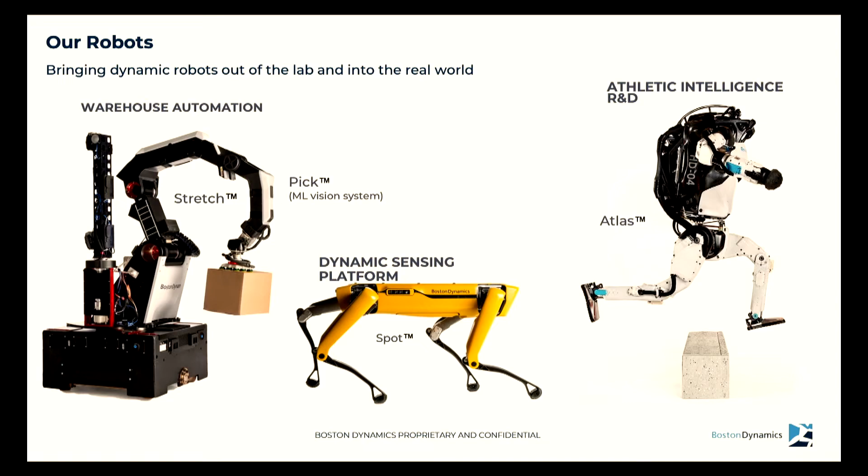We have Atlas, which is the robot that you see dancing, doing backflips, doing parkour. And that's really research into what our leadership calls athletic intelligence. Basically, how far can we push physical machines to behave like human athletes, essentially, and then take the learnings from that, which is the bleeding edge of dynamic robotics, mobility and balance, and then have that filtered down to our commercialized robots. And the first commercialized robot is Spot.

Spot, you can call it a robot dog, some people call it a quadruped, it's a four-legged robot. We've got market speak for it, agile mobile robot, to distinguish from wheeled mobile robots because it has more agility with the legs than the wheels. And lately we've been framing it as a dynamic sensing platform. It is a tool for you to bring automation dynamically through a human purposed environment rather than statically instrumenting that environment.

Here we go. So the way that Spot works is that its body is surrounded by specialized cameras that gives it obstacle avoidance, an amount of depth detection that helps with its autonomy.

It's got automation. This is a big part of it, which is how do we take labor hours out of rote tasks and free up skilled labor for other things. So it does that through a 90-minute battery life, and we also have a self-charging dock to extend that, just like drones with base stations. Some of you might be familiar with that.

And then we allow people to customize it because just the naked robot doesn't really achieve that much. This is a vehicle or a platform for sensors and for software applications to achieve whatever your use case is. I keep pointing this at the TV instead of at the computer.

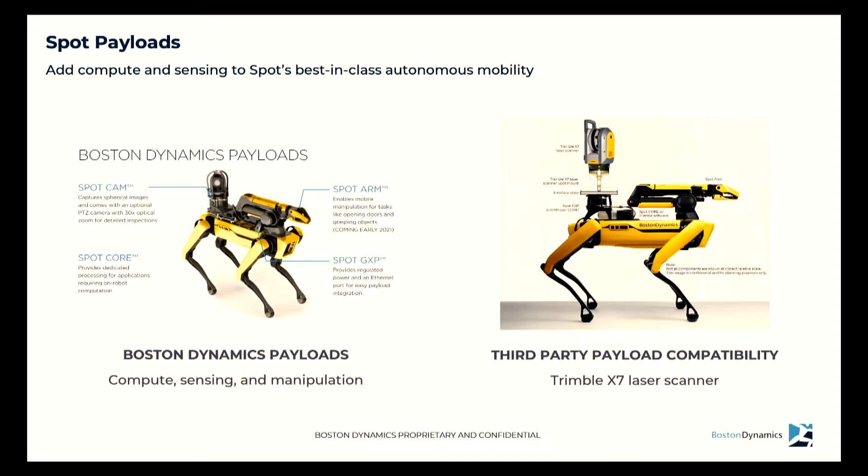But we also knew that we had to maintain compatibility with the things that you already use, taking field devices like 360 cameras, laser scanners, GNSS receivers, and total stations, and allowing you to put those onto this mobility platform to move them autonomously throughout your environment.

So there are a couple different ways to control the robot. We knew that if we had the goal of bringing dynamic robots like Spot out of the lab and into the real world, it had to be as easy to use as, say, like a commercial drone, which is basically like a video game with some joysticks. And that's how our tablet works.

So when you are in the field with the robot, you have a field tablet. You teach the robot where you want it to go in your environment and what you want it to do. That might be a laser scan, taking a photo, doing a little dance. It doesn't matter, the robot will remember it. That gets recorded, and then you can play that back autonomously as many times as you'd like. So the value comes from the frequency and the repetition of that data capture.

And the secret sauce, and the thing that's close to my heart, is how do you make autonomy work in a dynamic environment like a construction site where that site is changing day after day after day. So over the summer, you're gonna have Foster and Partners up here talking about how painful it was to go through our early software, and I'll let them tell that story. But thanks to them, we have the right insight and customer feedback to build in additional features.

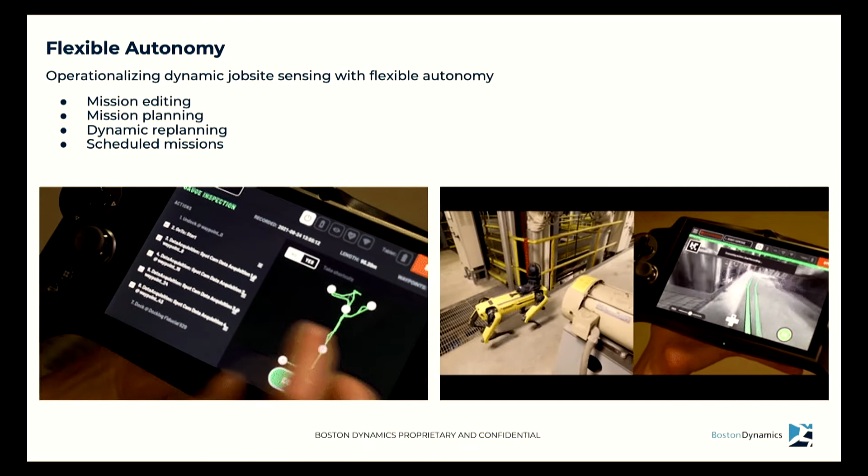So in theory, you want to do the same data capture path, like a daily site walk. I want to take the same 50 photos at the same exact locations at the same time of day, or the same 30 scans every week at the same locations. In theory, you just want that to be the same path every time. In practice, that's not possible on a construction site. Somebody's going to close a door, somebody's going to park a scissor lift. There's going to be an area that's inaccessible because it's going from decking to a poured floor.

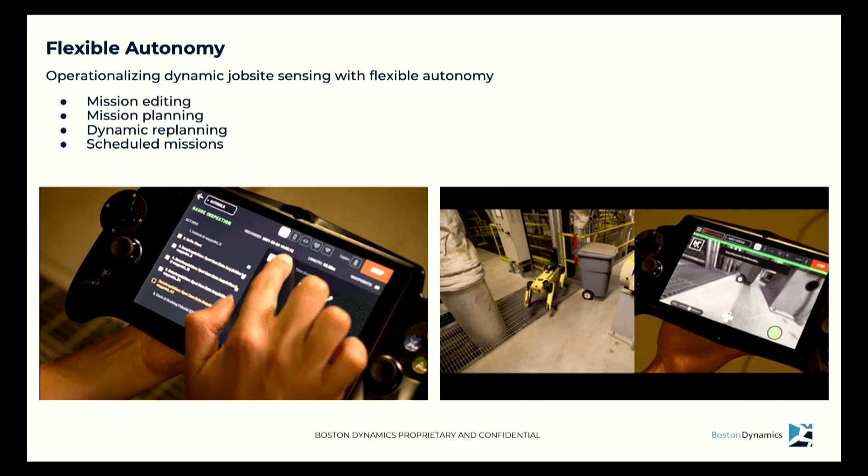There's going to be some reality of the job site that keeps you from doing that. So in the latest software, when you teach the robot where to go, you do that initial recording on site. Wherever you take the robot, there's an underlying topology that interconnects all possible pathways through that environment.

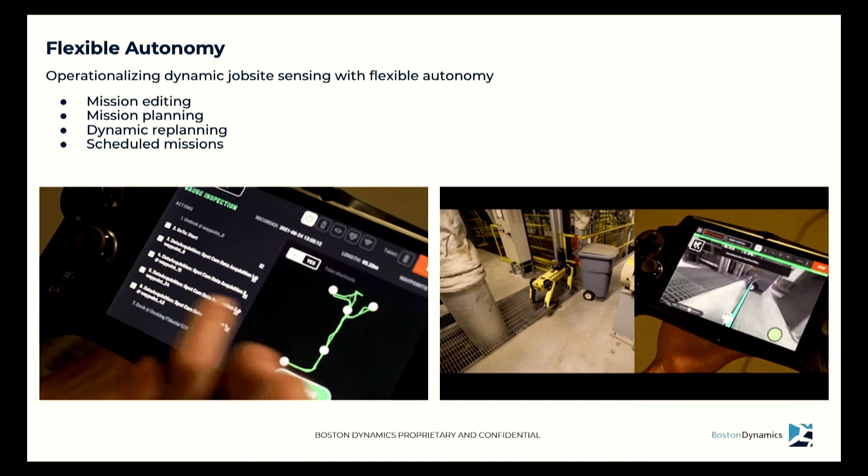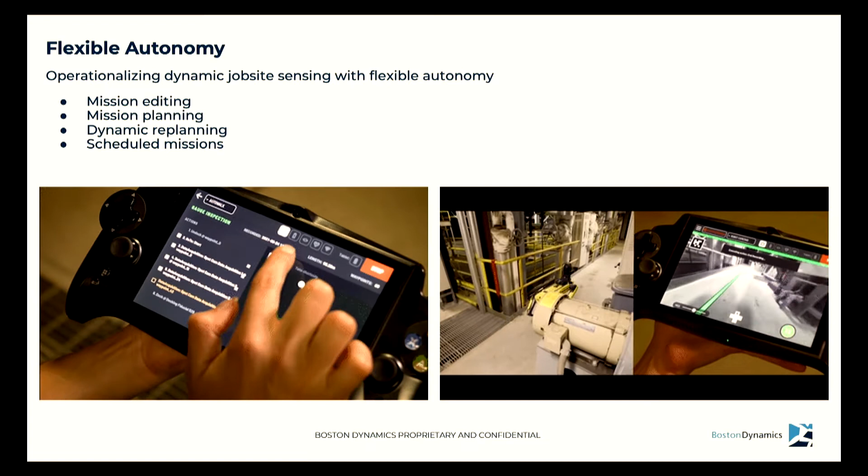So when it inevitably runs into an obstacle, it will just replan. You get a preview of the initial plan through your environment, doing the data capture in the order you want. You can specify and edit that, but the robot will replan itself within safe operation parameters as it encounters obstacles. There's no world in which the robot does the same path every time, and that's okay.

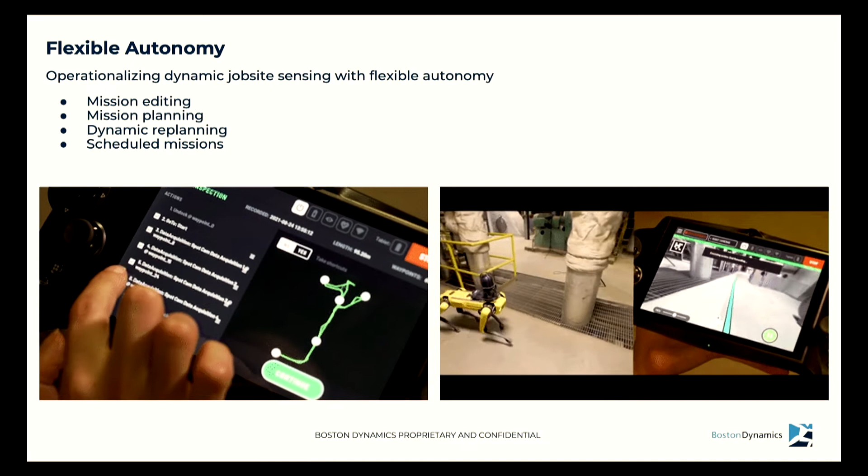This technology is supposed to come into sites as they are. This is not like warehouse automation where the environment has been prepared for the robot. What is novel about this robot is it goes into human-purposed environments as is and adds value.

We're also starting to move from general data capture—just taking a 360 photograph or a scan of the entire building and quantifying progress from that—to being more aware of certain types of objects. Maybe you're asking specifically: do I have the right number of fire extinguishers, and tell me where they are, or tell me if they're in the right place.

Are all of my analog gauges within an acceptable range? Are all the heat signatures or radiation signatures in my environment within an acceptable range? It's a yes or no question, and that's what you care about, and you get that in near real time from the robot.

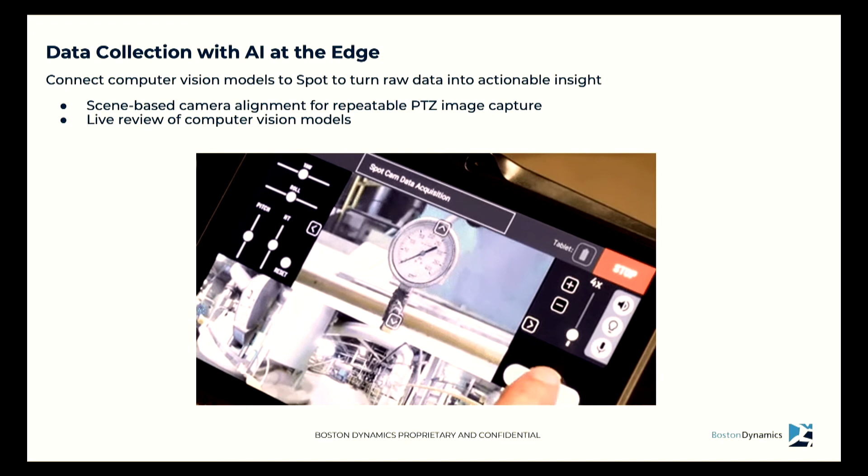And we do that with improvements to computer vision, both ones we've implemented in our own software and also being adaptable with models you might make, models you might train from the frequency and repeatability of using the robot in your environment, or models you just download off the web because other people are working on them as well.

For those models that are siloed in cloud-based applications, we've also given you the ability to upload directly to the cloud through the self-charging dock. So we talk about the dock as a way to extend the battery life and power of the robot for longer missions.

But the thing that excites me about the dock on a construction site is you're never going to have good Wi-Fi or LTE on a construction site—it's just not practical. So if you can't constantly be connected to the robot, you can use that dock as a base station. Whether wired or wireless, it's at least in a static location with a good connection, which is important because one, you need to tell the robot to initiate a mission, and two, more importantly, you need to grab that data when the robot gets it and upload it.

And what I love about that is if you're a stakeholder on the other end who needs to review that scan data or those images, you don't necessarily know or care that there's a robot on the job site. You just know that data is appearing every 90 minutes, and that's what you care about to keep moving. So I like that the robot starts to fade into the background as we work on this as a whole product solution.

We also have something called Scout. Scout allows you to basically put an on-prem server in your environment for advanced remote operations. This tends to skew more toward customers in fixed industrial, manufacturing, and utilities environments, where they can invest in infrastructure. It's a little bit tougher to do this on an under-construction job site.

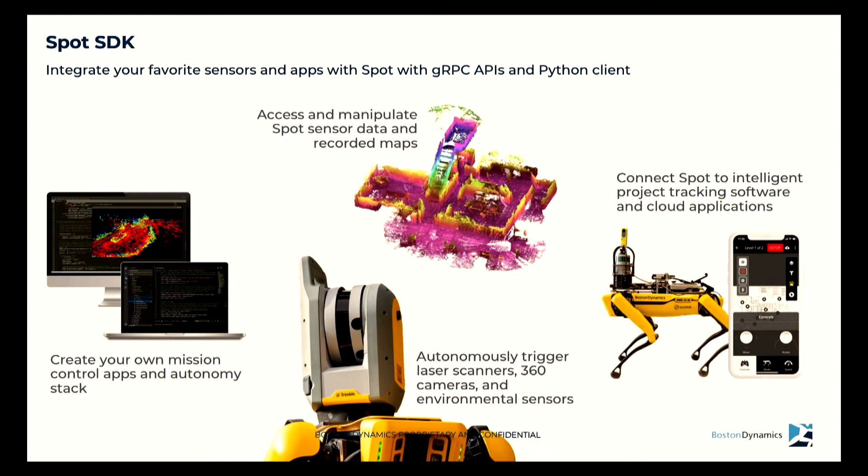When we talk about how Spot is actually being used in construction today, I could put any statistic up about how bad construction is and what the business problems are. By the way, I started in architecture and construction. I am not a roboticist. I come from this industry, and that's why I joined. I was an early customer of Spot and was so excited by what it was able to do on site that I joined the robot side of things.

But the big picture for me is you don't know what's going on a job site at any given moment without physically going there, and that's a problem. If you don't know what's going on in real time, mistakes are made, things get delayed, the site's not staged properly for a trade to come in. Those things pile up, and if your project is over schedule, it's over budget.

So broadly, what are we trying to do? We're trying to increase visibility. That cannot be done and should not be done with people. That should be done with automation. So I like to phrase it as think of Spot as a physical background process, something that's just constantly moving around the site, collecting reality capture so that you have a continuous idea of what's going on at that job site.

So these are all the other ways that you could solve this problem: people, fixed sensors, and other types of robots, and the reasons why that doesn't quite make sense. This also describes about 3 years of my life before I discovered Spot, which was, I cannot find a means of robotic locomotion that is able to traverse my entire job site, that is able to deal with obstacles, material pallets on the ground, temporarily inaccessible areas, stairs, gaps, ramps, et cetera. I love drones, but there are certain limitations to being able to utilize those in interior commercial construction environments. So that's where the strength of Spot really lies, to be able to move.

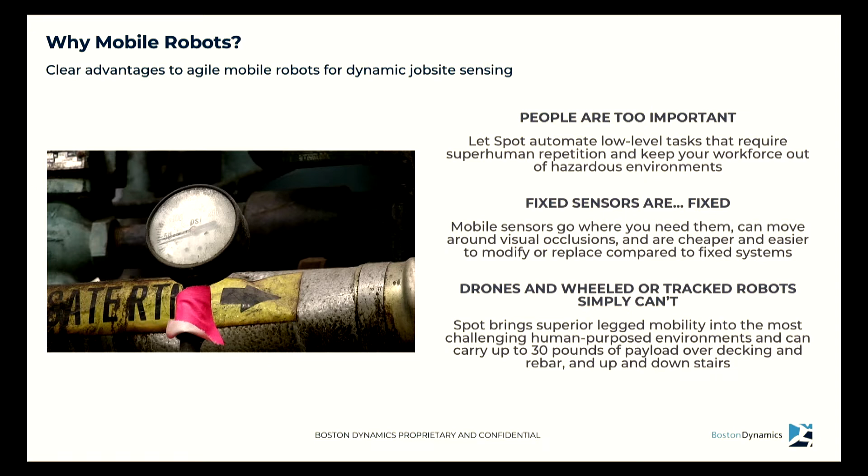If you think back to the days when the company was owned by Google, when we first started taking larger quadrupeds from earlier research and making them smaller into the form that we have with Spot today, it was entirely premised on fitting through a door and moving up and down typical stairs. We need to bring robots into human-purposed environments.

So we're working on two main applications, or our customers are rather, that are really the same thing, but it just depends if you work in BIM or 3D or not at this stage. I see these things converging.

So the first is site progress monitoring, which is basically the daily job walk: taking photos, pinning those to some floor plan. Here we're showing the HoloBuilder integration, which is called Spot Walk, and then having those points get updated so you have a historical record. So this is a very basic job site documentation process that gets automated.

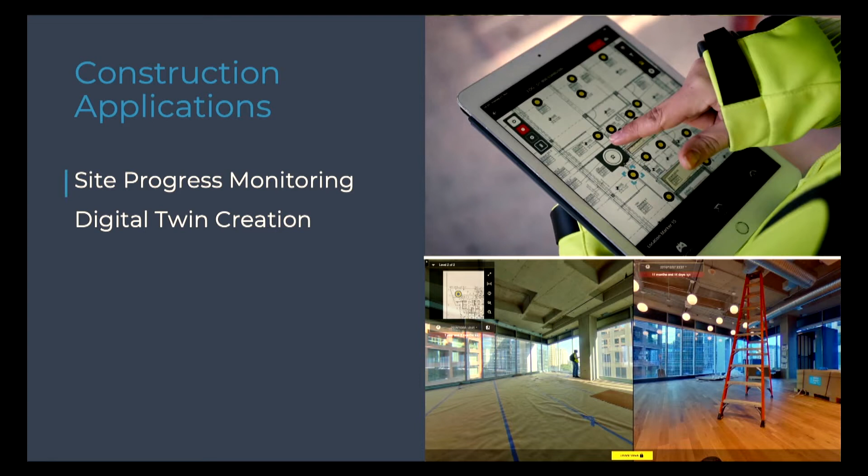And then you can do point-in-time comparisons, and because of the frequency and repeatability of the data, you have a cleaner data set from which you can start to leverage AI tools, computer vision tools that all of these apps now have, that automatically quantify work in place.

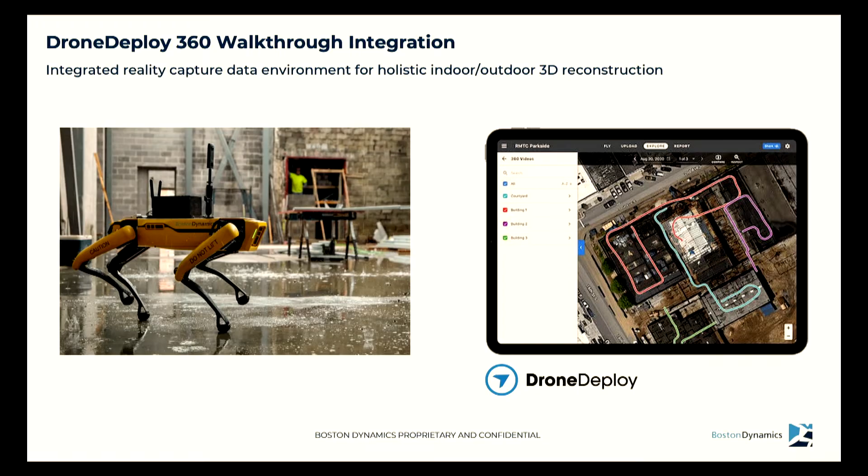Some of our customers, like Brasfield & Gorrie, have also used this with 360 video. So this gives you a Google Street View style path that you can kind of jump into, virtually experience the site, and then the denser image frames that you get with video data allow you to do things like photogrammetry for 3D reconstruction. In this case, with DroneDeploy in combination with drones for full interior-exterior.

Digital twin gets more into the 3D space, but also gets more into the real-time synchronization between what's going on in the digital asset and what's going on in the physical environment. So on the right, you're seeing the Trimble Field Link product with Spot that we're going to talk about, or David's going to talk about next.

And then on the bottom, you're starting to see tools. This one is AVVIR. There are several of them out there competing that start to associate features and point clouds with BIM elements so that reality capture data can actually be ingested by BIM.

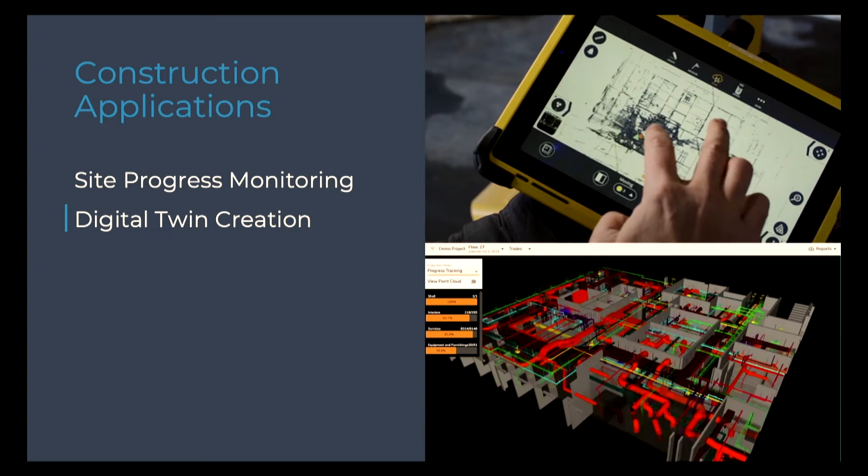There are two big problems with BIM and reality capture. One is that BIM was not designed for reality capture. The second is that no one's using BIM. But that's a separate conversation we can talk about. We're working toward that end, we have that vision, and that's where the industry is going.

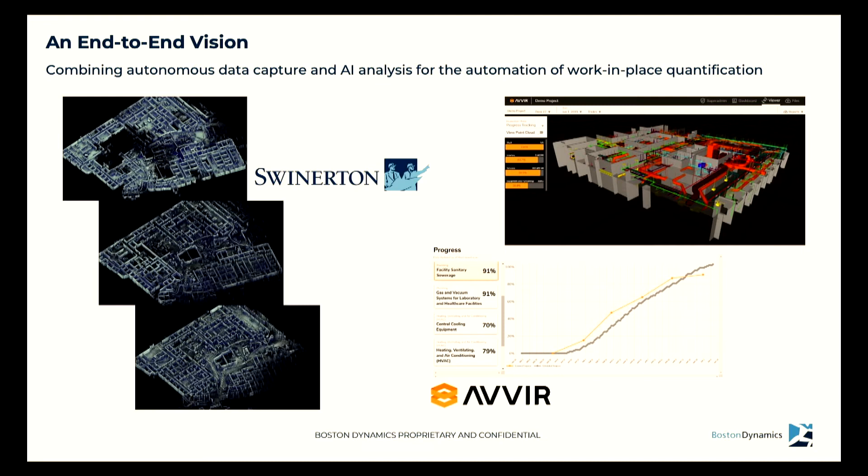So here we have Swinerton, again working with the same tools and starting to realize if scanning is now very easy, now we can scan every week, what new possibilities does that provide? Spot is not replacing how data capture was done before. Spot is a technology that's allowing you to rethink what you can do with reality capture if it can be done constantly, because it's so cheap and easy and automated.

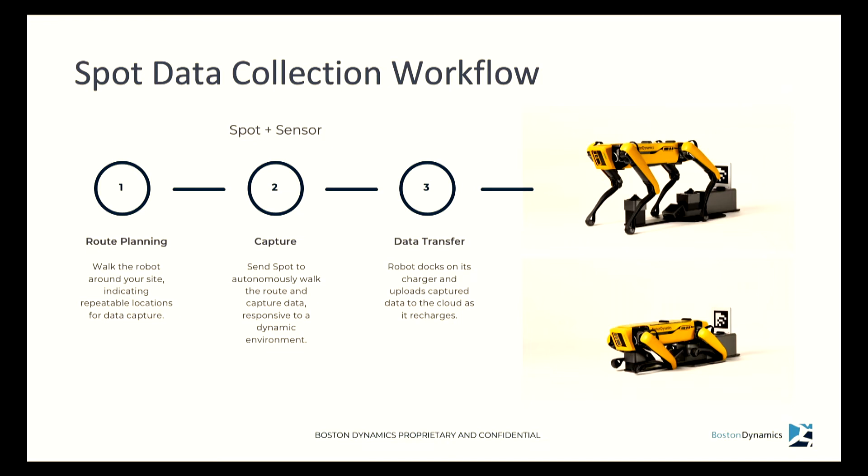We're going to give you the software to plan the data capture. We're going to give you the robot to automate the data capture, and then we're going to give you the tools that facilitate uploading that as part of the mission at the end of the data capture to whatever cloud location or application you want.

But we need partners, we need an application ecosystem to do all of the analysis. We're not going to work on construction-specific AI at Boston Dynamics. We're a robotics company. We're going to create a robust robot platform for a more knowledgeable construction company to solve some of those downstream problems that turn data capture into action and insight and value.

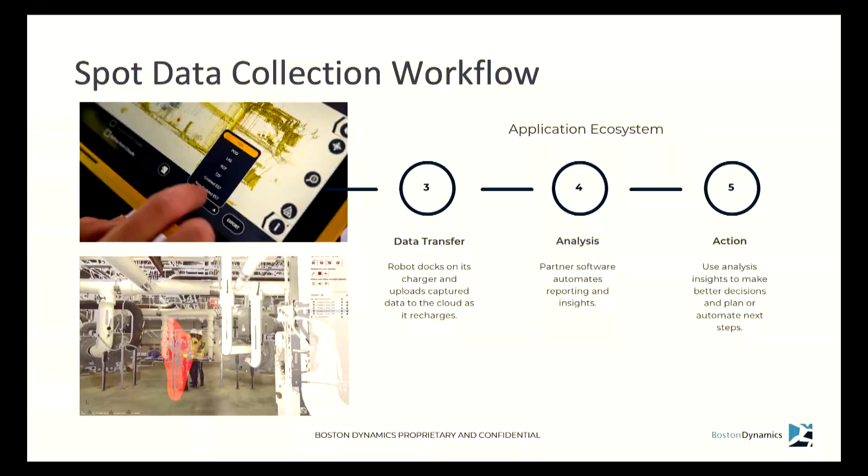So with that, I'll turn it over to David.

Thanks, Brian. So I'm David Burczyk, I'm the construction robotics lead at Trimble, and I'm focused on heading up our business area and the integration of the Trimble platform with the Boston Dynamics platform.

So as Brian was talking about, a year ago we announced a strategic alliance between Boston Dynamics and Trimble. And the reason for that is we wanted to merge the expertise that both companies brought into this one common platform to bring robotics out to the job site.

Our underlying vision around this integrated solution we're working on is really to bring fully autonomous robots out to the job site and become a collaborative robot, or cobot, to work side by side with the teams on site. Let the teams on site focus on higher value tasks, and let these robots come out and start to capture and take over tasks that might be unsafe or redundant, so the teams on site can really focus on the high priority items they need to work on. The value of bringing this together is that it improves the overall safety, quality, and speed of construction on the job site.

So that became the underlying vision of this co-developed, collaborative platform between Boston Dynamics and Trimble.

So what we've done is put together an autonomous field capture module with our software called FieldLink. This is the application that runs all of our hardware used in the building construction process today—it's the software that controls our robotic total stations, the 3D laser scanners, and the GNSS or global navigation satellite systems used for building construction, from 3D reality capture to building set out with total stations. We've taken the Boston Dynamics platform with Spot and integrated it into that application so now you have one software application that controls multiple hardware devices for all the different ways data capture can be collected on the job site.

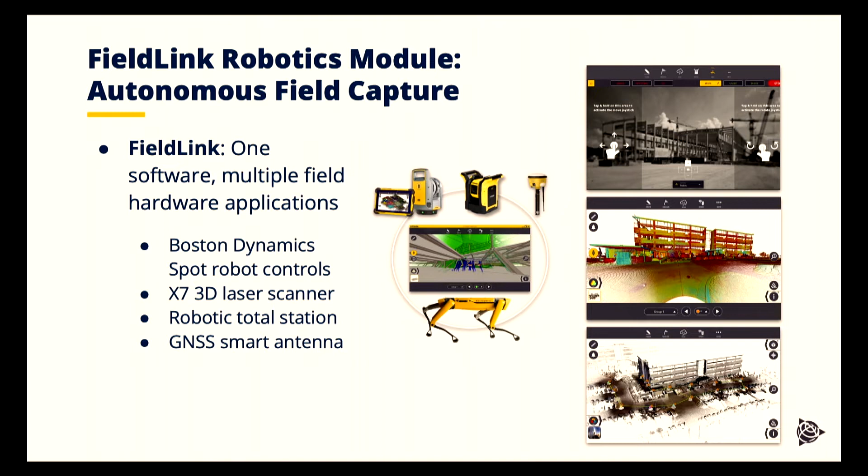We've brought this together as a co-developed solution to add this as a robotic platform on the job site. So what we developed working with Boston Dynamics is a full turnkey solution. We've put together an application that's the bare minimum of what you need if you want to bring robotics out onto the job site, taking what Boston Dynamics provides through the Spot platform with the Spot robot.

It's the enterprise robot, with their onboard computer called Spot Core, and also their enhanced autonomy package. We've merged that with the Trimble solution. Our first integration is using it with 3D laser scanners, and then we're going to start to carry that into using Spot with robotic total stations, and also with GPS applications as well. But all this is to provide a turnkey solution so you're working with one application, one vendor for all your support, training, and needs out on the job site.

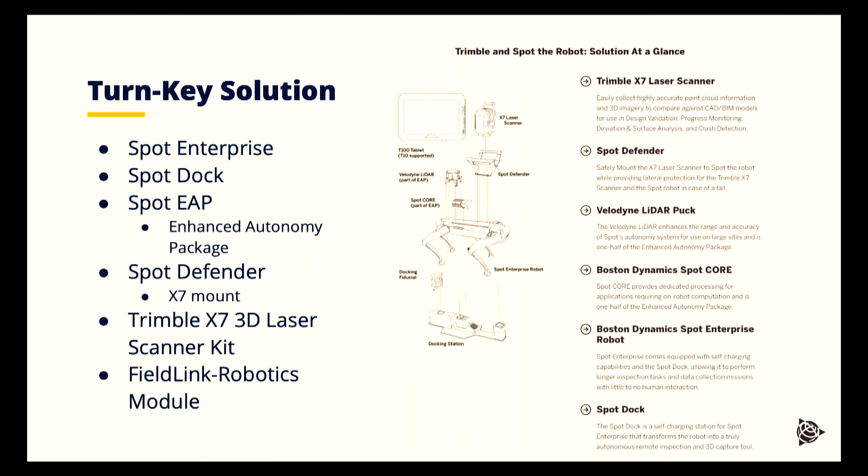If you're not familiar with how you actually operate Spot to start the autonomous capture on the job site, the very beginning is to go out and define a mission. You need to tell Spot where you want to go out and capture the data. That's the first step of the whole process.

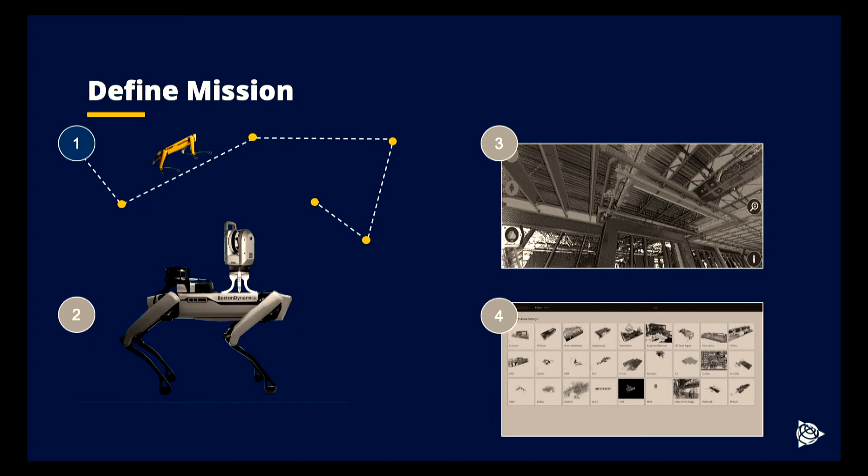Using the solution, you take the ruggedized tablet—we have our own tablet device that works with the Trimble solution, with Spot controls built in. It's all through a digital joystick kind of interface that allows you to connect to Spot and manually control it. In that application, what you're doing is teaching Spot how to walk the site.

Oftentimes there's some confusion when people see images of people with the tablet controller operating Spot—they think it's just a remote control car. But essentially what you're doing is teaching Spot its path before it can do that autonomous mission.

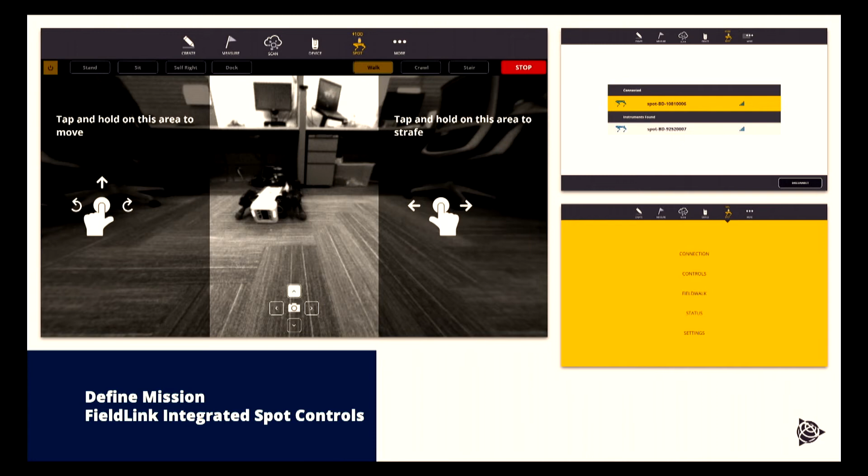So you're going to go out on the job site and teach Spot where you want it to go and collect this data. You walk it through the job site, and as you go along that path, you can define what are called waypoints. Waypoints are areas where you want Spot to perform some type of action, depending on what payload is on the back of Spot—that's where the action will take place.

In the case of putting the laser scanner on the back of Spot, everywhere you define a waypoint is where a laser scan will be captured. You walk Spot along the job site, teaching it this path, and it records its locations and stores that in its memory. Once that's stored, you can run that mission multiple times on a regular basis, or schedule it to be captured regularly.

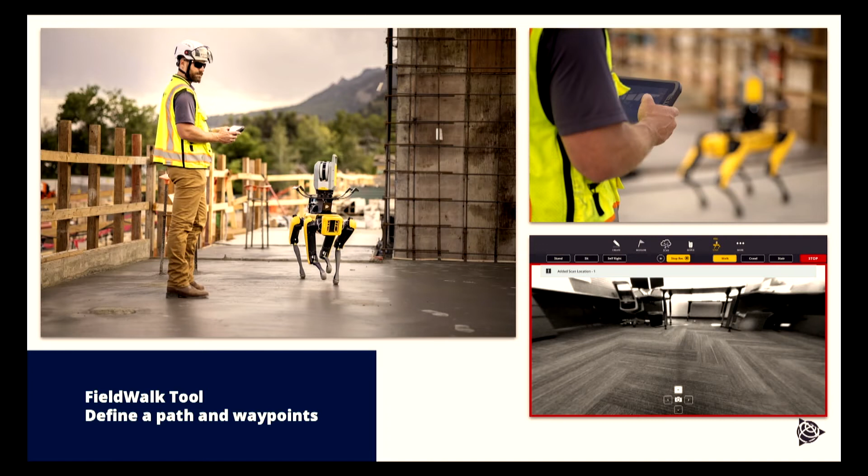Now that you've taught Spot the path, you can do the autonomous capture piece, where the value of the different types of solutions on the back of Spot come into play. Because if you want this to be an autonomous solution, it needs to be hands-off—you need to take the human out of the equation so they don't need to monitor the different payloads on the back of Spot.

This is where, like the laser scanner we're using—called the X7—that's on the back of Spot has the ability to do its own automatic calibration, level detection, and registration of the data in the field. So once Spot starts that capture, all the registration and acquisition of data is happening automatically on the job site.

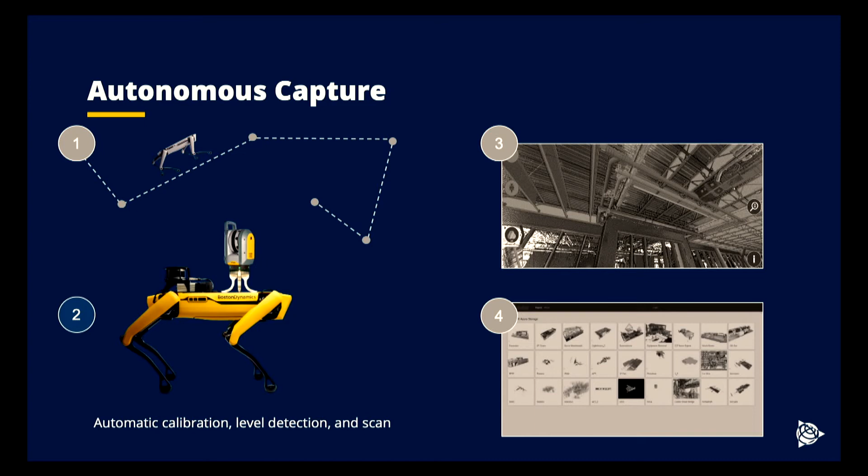Once you're ready to do these kinds of missions to be repeated over time, you go back into the software, and that mission you programmed is stored in Spot's memory. You can activate that mission, and it will have Spot go out and walk the job site. What you're seeing on the screen is an image of what you'd see on the tablet.

As each individual scan is being captured, it's being registered in real time on that tablet. As Spot's collecting the mission, each little triangle on the screen is a station view or waypoint where that scan was captured, and they're registering as Spot walks along the site, so that by the end of its mission, you have a fully registered point cloud.

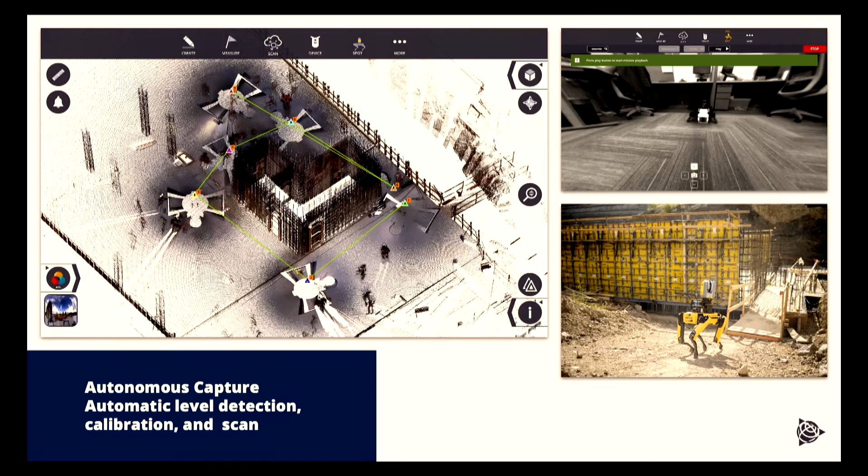And then once you have this fully registered point cloud, you're going to start to do different types of in-field workflows. One of the things we've built into the FieldLink application is to start doing some real-time analysis while you're on the job site, before you've even left.

So we have the capability to do surface analysis. A lot of contractors out doing concrete pours want to be able to still work that concrete to make sure it's a level plane before it actually sets in place. So we can go out, capture laser scans as the concrete's being poured.

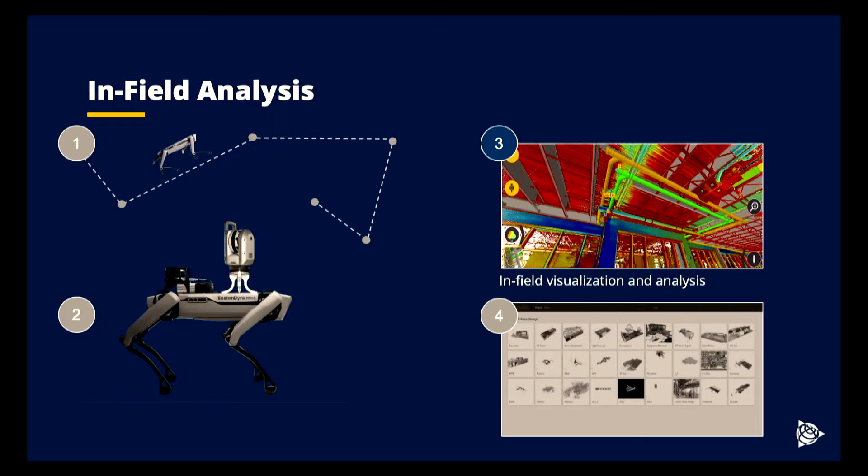And we can run an analysis to determine where the highs and lows are in the slab being poured. And then we can also start to do scan to model comparisons. Within the FieldLink application, we can load in the 3D coordination model used for the project, and as those scans get captured, they get dropped in place. We can then run an analysis between scan and model and do a visual deviation analysis to see how the scan is versus what was designed in the model.

And then as we have that information collected and it gets fully registered, we pull it up and push it up to the cloud because we want to share it out with the project teams.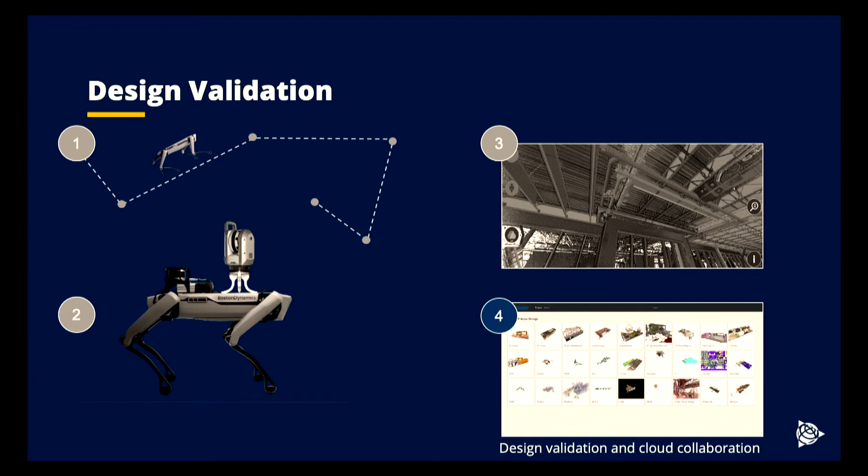So we have an application called Cloud Engine that then, when Spot comes back to its docking station, whoa...

Technical glitch. Fast forward here. Yeah.

Perfect, thank you. So when Spot comes back to its docking station, we will automatically pull that registered scan data off of Spot and get it posted up to a location on the cloud.

We're using an Azure web server, and then we can automatically notify team members that there's new data to be used for the project. So then you can start to do your design validation pieces.

So if you remember the slides that Brian had, there are different steps of where things are with the robotic workflow. We've automated the whole upfront process of capturing the data.

We've pushed it up to the cloud. And now the second area of focus is to start to take this data and do something with it. Because what you're starting to see now is this ability to capture data more consistently and more frequently. What do you start to do with that data?

So it's opening up new opportunities to provide new insights into what's happening on the job site. We take that information, pull it off of Spot, get it posted up, and then we can start to run design validation. So doing clash detection, showing change over time with cloud-to-cloud comparisons. Scans captured on one day can be compared with scans captured on a different day.

All that information starts to feed project information. Where are we at within the schedule? And so that's the next area of focus, is to really start to look at those types of applications.

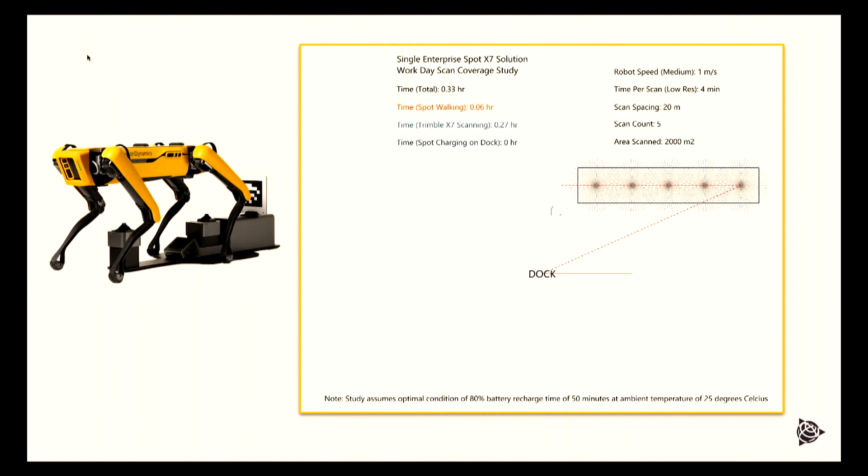And so right now, a lot of applications are using one dock kind of centrally located on a project site. So then how much data can you get captured between charges before you have to come back to that docking station? And then as you start to look at things, you can apply multiple docking stations so you can extend the mission range in the way that you start to capture data.

So this is an ongoing area of focus where we start to look at providing some guidance around how the whole system works as you integrate it with the docking station and the different settings as you're capturing data.

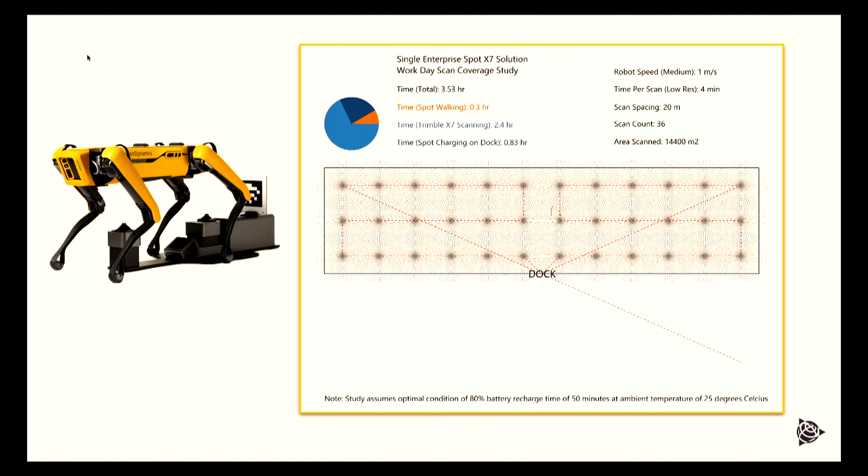So then to gather additional information about how we're doing things on a job site and how we're using the different applications, we have a program called the Early Experience Program. This is where we have the early adopters of the technology, where we start to work with them on actual use cases for how they're using robotics on the job site.

So these are 5 use cases that are actual projects working right now with our different customers that have invested into robotics.

And it's a little bit of everything, where they're using the scanners, they're using the total stations, they're using the GNSS applications. The most common use case that you'll see is creating that digital twin, where you have energy companies, facilities managers, manufacturers of different products. They want to be able to capture what their facility is like or what their plant is like, and they want to have that as a digital twin.

So they're using the scan data to create that kind of hybrid digital model, where you have a combination of both modeled elements coming from a BIM, or you have the point cloud data that represents the real world conditions. And then they're using that to inform the overall maintenance of the project. They're also using it to document change in different pipes and things of that nature.

We have one energy customer where they have over 60,000 miles of pipe that they have to inspect constantly in one of their refineries. The way they do that today is manually walking the site and just taking photographs. By having the robot go out and run that on a more consistent basis, they're actually capturing scan data that they can run analysis off of, and they can start to see deviations and deformities in the pipes that are not visible to the eye, but you can start to see that with the measurement data that comes off.

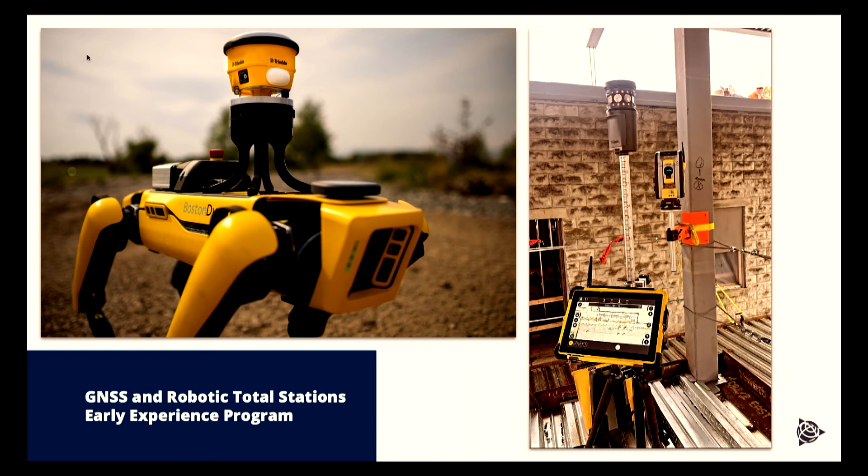This is really popular with energy companies and contractors building solar field arrays in remote areas. They don't necessarily have teams on site, so they want to put a robot out there. Using GNSS, we can teach a path or program one in using a series of coordinates, download that into the robot, and with onboard cameras go out and do inspections. One example is solar field arrays, teaching a path, downloading coordinates to go up and down each row, looking for QR codes on the solar panels to document if things have been installed as planned.

The other popular application is with total stations. In building construction today, we're using robotic total stations to take the 3D models used during the design process and accurately lay out what's in that model on the job site. When that kind of technology was introduced, it was revolutionary because we started to automate more of the process of accurately taking that 3D data and bringing it to the job site.

Now contractors using that for building set-out want to take it to the next level, where we can start to enable a 24-hour work site. Using that same technology, Spot can be used as a platform to do the layout automatically overnight, so that you come into the job the next day and all the points that need to be set out from the model have already been laid out, and you can start the installation.

So this is the next area we're going to be working on. We're starting integrations into those two products, and we've rolled out the commercial application using the laser scanners. It's a pretty exciting time with lots of different things starting to happen. That's where we are today, and we're going to continue to focus on these different workflows, co-developing the solution with Boston Dynamics.